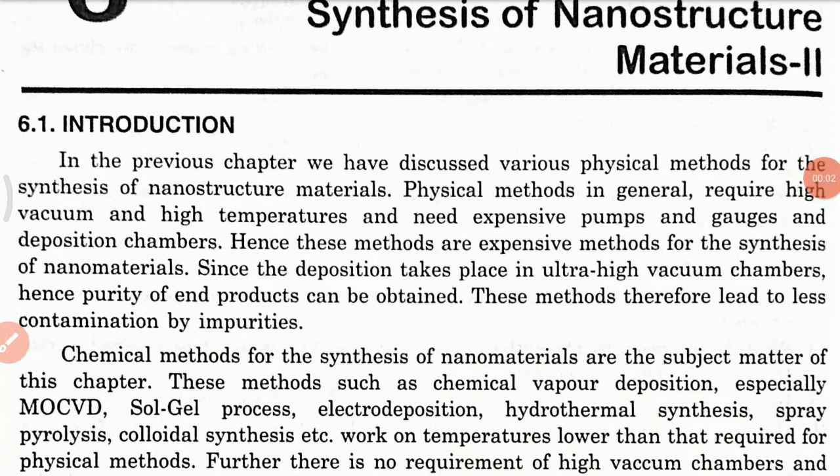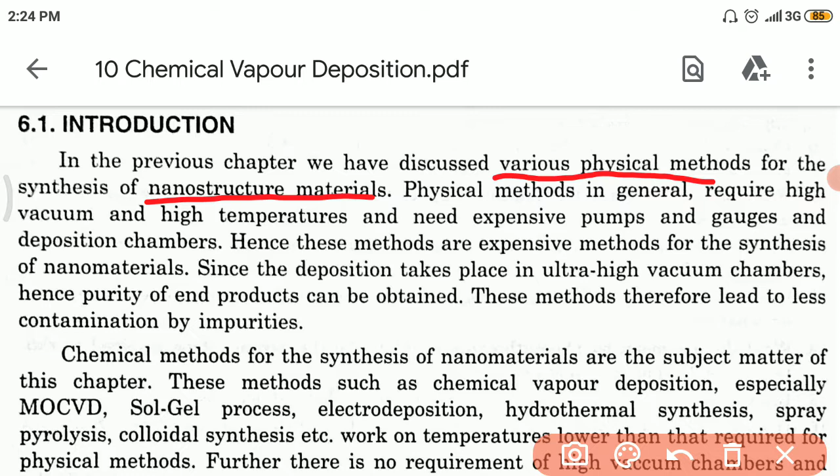So we have already discussed the various physical methods for the synthesization of nanostructure materials, and these physical methods in general require high vacuum and high temperature. Also they need expensive pumps and gauges and deposition chambers for their operation. That is why these methods are expensive methods for the synthesization of nanomaterials.

Now since here the deposition takes place in an ultra high vacuum chamber, the purity of the end products can be obtained, and these methods therefore lead to less contamination by impurities.

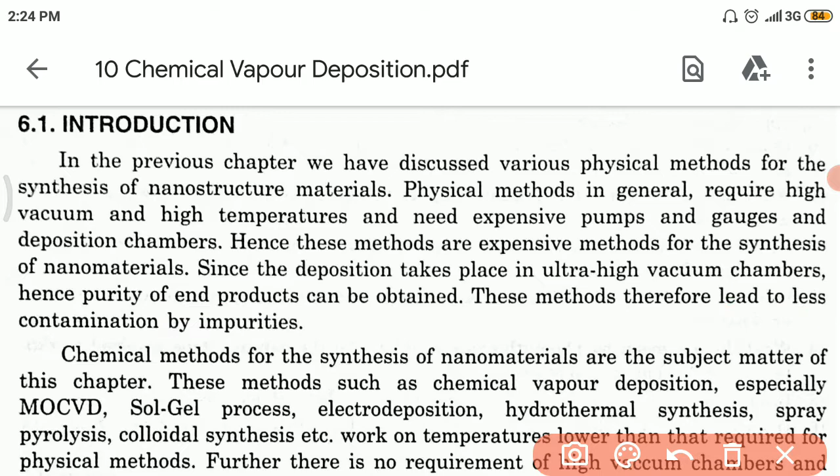Now in case of chemical methods, we can have synthesis of nanomaterials by chemical methods, which are actually the subject matter of this chapter, and these methods include chemical vapor deposition, especially MOCVD, that is metal organic chemical vapor deposition, then the sol-gel process, electrodeposition, hydrothermal synthesis, spray pyrolysis, colloidal synthesis, etc., which work on temperatures lower than those required by the physical methods.

Further, there is no requirement of a high vacuum chamber, and these chemical methods are quite inexpensive. So as a result these methods provide cost effective synthesis of nanomaterials as compared to the physical methods. Now chemical methods are suitable for large scale production, and these methods involve simple techniques,

but there are possibilities of foreign atoms or ions being adhered to the desired film or materials as impurities. Hence we can say more contamination occurs in chemical methods than in physical methods, so it will result in less purity as far as the end products are concerned. So this is the basic introduction.

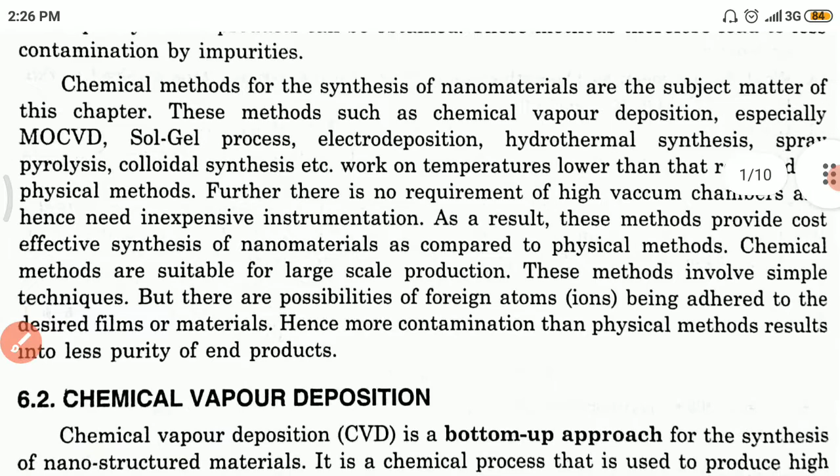Now let us come to the subject today, chemical vapor deposition, in short CVD, which is a bottom up approach. Bottom up means from small materials having nano dimension we build up towards the bigger, bulk size material for the synthesization of nanostructure materials. It is a chemical process used to produce high quality, high performance solid materials.

In the semiconductor industry, the CVD process is used for the production of thin films and in micro fabrication processes, which widely use the CVD technique to deposit materials in various forms such as monocrystalline, polycrystalline, amorphous and epitaxial, etc.

These materials include silicon with oxide, carbide and nitride, etc. Then carbon, such as fiber, nanotubes, diamond, graphene. Then we have fluorocarbons, filaments, tungsten, titanium nitride and various dielectrics with high dielectric constants.

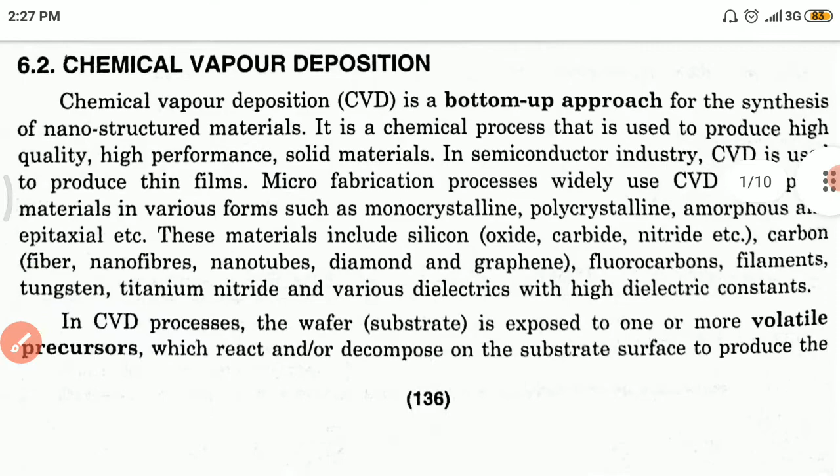Now in the CVD process, the wafer, that is your substrate, is exposed to one or more volatile precursors, which react and/or decompose on the substrate surface to produce the desired deposit. This is shown in the figure. You can see here the CVD, that is chemical vapor deposition, apparatus.

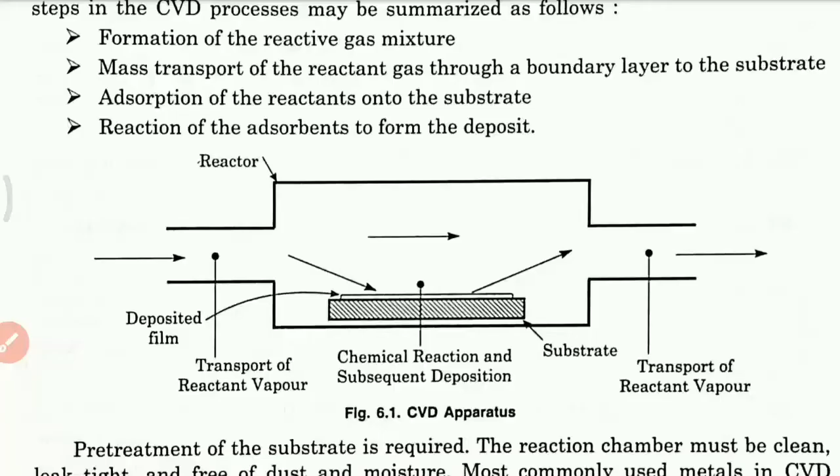In this figure, this is our substrate, and above this substrate we have the deposition of the thin film by chemical reaction and subsequent deposition. From this path we are transporting the reactant vapor, which goes this way, is utilized in the chemical reaction and comes out this way. So this figure is quite simple.

Now coming back, here the process of decomposition can be assisted or accelerated by using heat, plasma or other processes, and the precursor can be in gas, liquid or solid form. Gaseous precursors are introduced into the chamber at normal pressures and temperatures, while solid and liquid precursors require high temperature and/or low pressures.

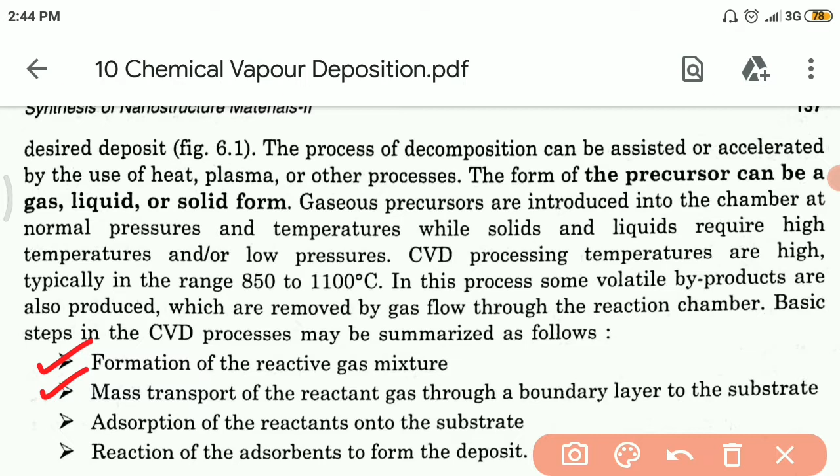Now CVD processing: here the temperatures are high, typically in the range of 850 to 1100 degrees Celsius, and in this process some volatile byproducts are also produced, which are then removed by the gas flow through the reaction chamber. The basic steps in the CVD process can be summarized as follows. Number 1, formation of the reactive gas mixture, then mass transport of the reactant gas through a boundary layer to the substrate, then adsorption of the reactants onto the substrate, and finally reaction of the adsorbents to form the deposit.

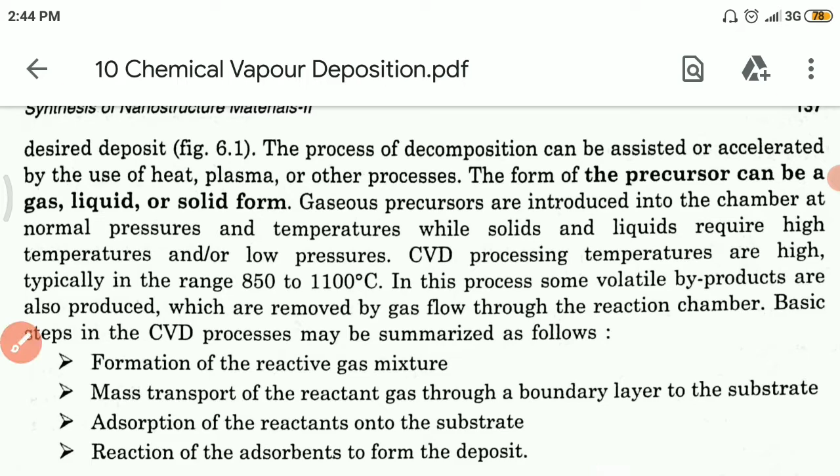Now some of the precautions required in the CVD technique are pre-treatment of the substrate, and the reaction chamber must be clean, leak tight and free from dust particles and moisture. The most commonly used metals in CVD coatings are nickel, tungsten, chromium, titanium carbide, etc.

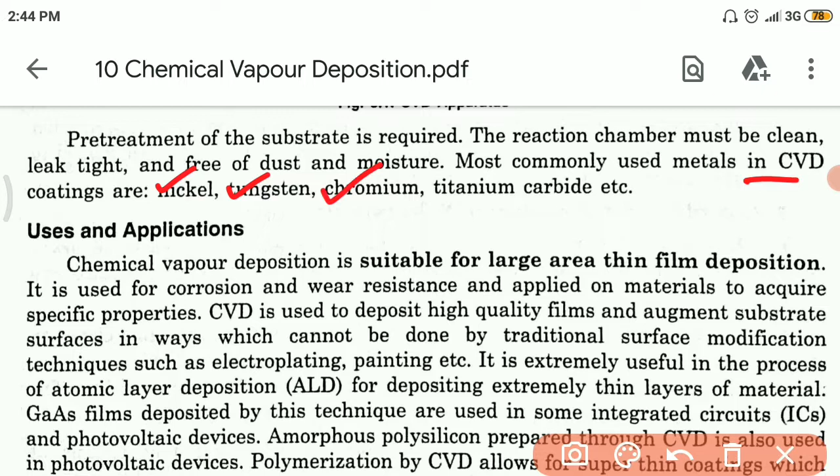Now let us see some of the uses and applications of the CVD technique. It is suitable for large area thin film deposition and used for corrosion and wear resistance, and also applied on materials to acquire specific properties. CVD is used to deposit high quality films and augment substrate surfaces in ways which cannot be done by traditional surface modification techniques like electroplating, painting, etc.

It is extremely useful in atomic layer deposition, that is ALD, for depositing extremely thin layers of material. For example, GaAs, that is gallium arsenide films, deposited by the CVD technique are used in some ICs, that is integrated circuits, and also photovoltaic devices. Similarly, amorphous polysilicon prepared through CVD is also used in photovoltaic devices.

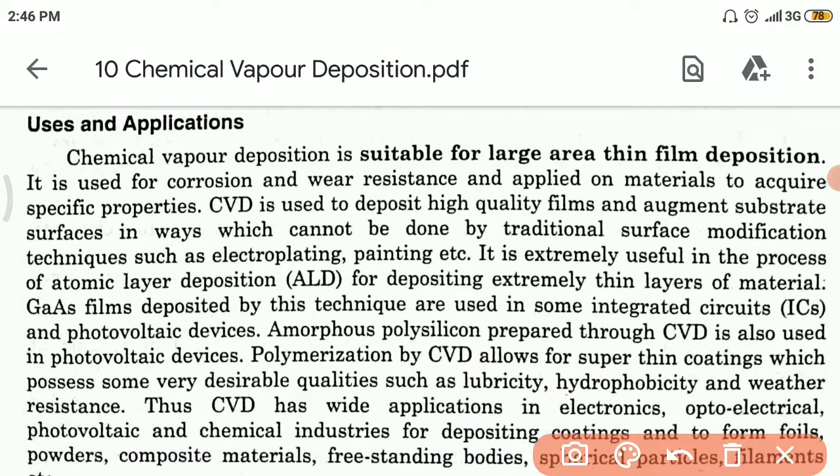Then polymerization by CVD allows for super thin coatings which possess very desirable qualities such as lubricity, hydrophobicity and weather resistance. Thus CVD has a wide range of applications in electronics, opto-electrical, photovoltaic and chemical industries for depositing coatings and to form foils, powders, composite materials, free standing bodies, spherical particles and filaments, etc.

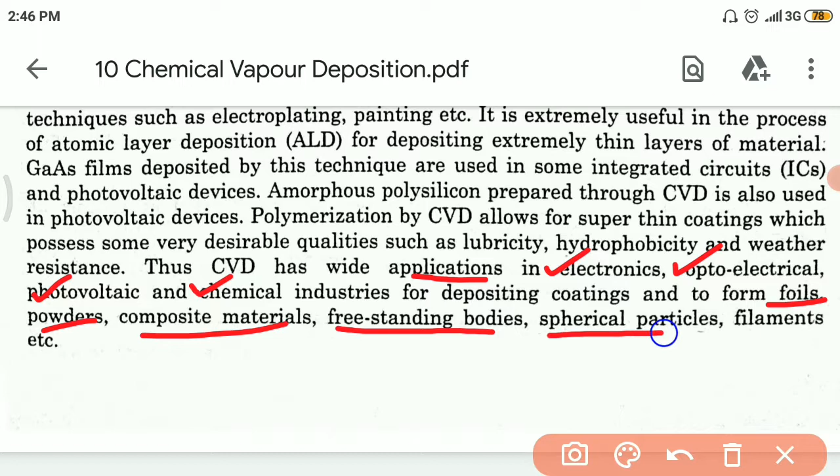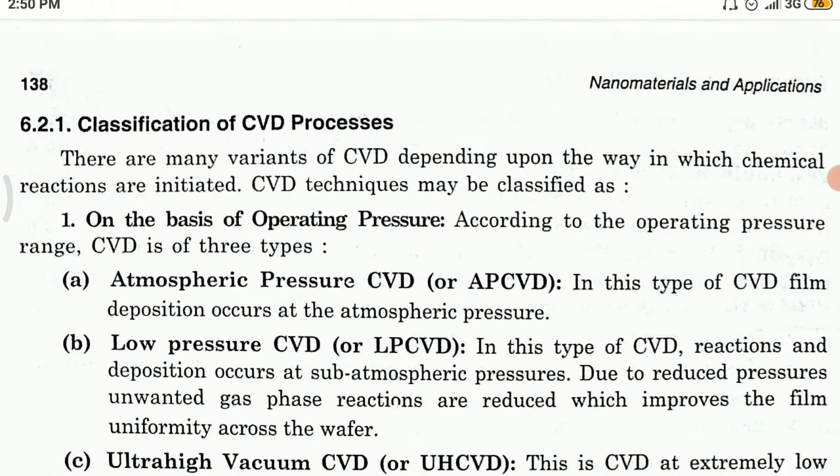Now moving further, let us classify the CVD processes. The CVD processes have variants which depend upon the way in which the chemical reactions are initiated. Accordingly, we can classify the CVD techniques as follows. First, on the basis of the operating pressure, it can be classified into three types. Number 1, atmospheric pressure CVD, that is APCVD, where the film deposition occurs at atmospheric pressure.

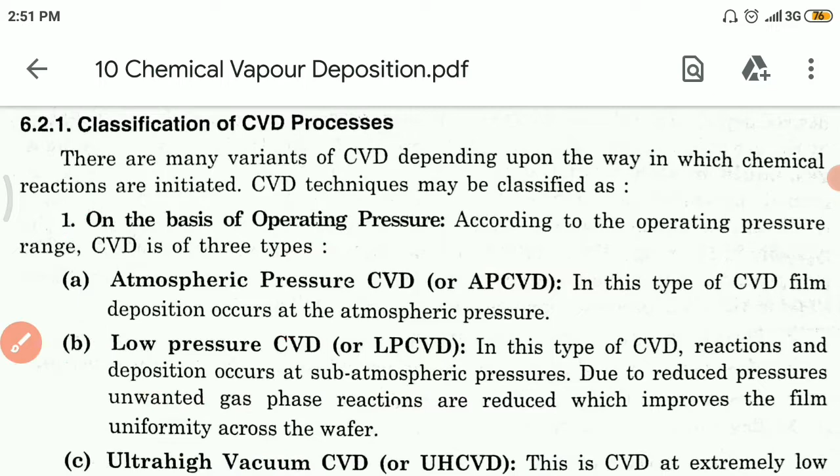Then low pressure CVD, that is LPCVD, where the reaction and deposition occur at subatmospheric pressure. Due to reduced pressure, unwanted gas phase reactions are reduced, which improves film uniformity across the wafer. The third one is ultra high vacuum CVD, that is UHVCVD, performed at extremely low pressure, typically below 10 to the power minus 6 Pascal, nearly 10 to the power minus 8 torr. Of these three types, the most widely used is LPCVD, low pressure CVD.

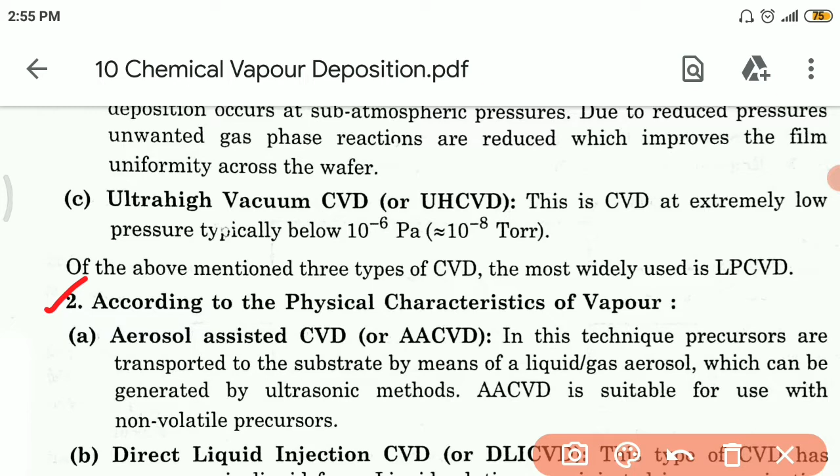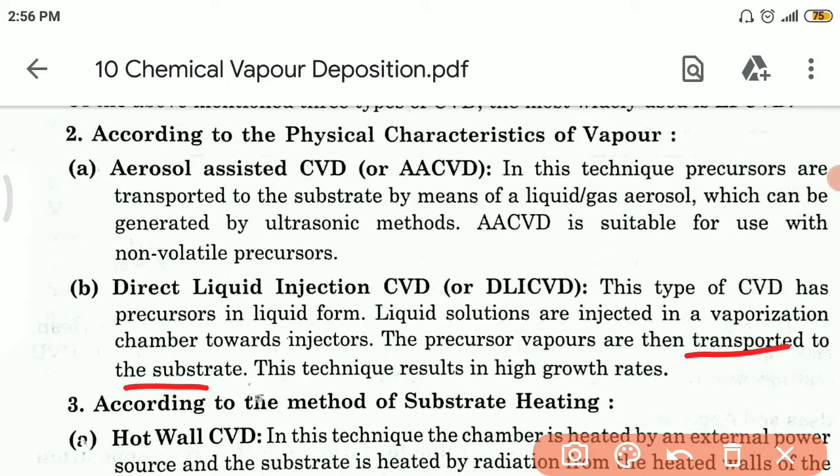Now the second category of classification is according to the physical characteristics of the vapor. Number one, aerosol assisted CVD, that is AACVD, where the precursors are transported to the substrate by means of a liquid or gas aerosol, which can be generated by ultrasonic methods, and AACVD is suitable for non-volatile precursors. The second is direct liquid injection CVD, that is DLI CVD, where the precursors are in liquid form and the liquid solutions are injected into the vaporization chamber through the injectors. The precursor vapors are then transported to the substrate, and this technique results in high growth rates.

Now the third type of classification is on the basis of the method of substrate heating, so we can have two types in this way.

Number one is the hot wall CVD, where the chamber is heated by the external power source and the substrate is heated by radiation from the heated walls of the chamber. And the second one is the cold wall CVD, where the substrate is directly heated either by induction or by passing current through the substrate itself, and in some cases the substrate is heated by directly placing a heater in contact with it. So here the walls of the chamber are maintained at room temperature.

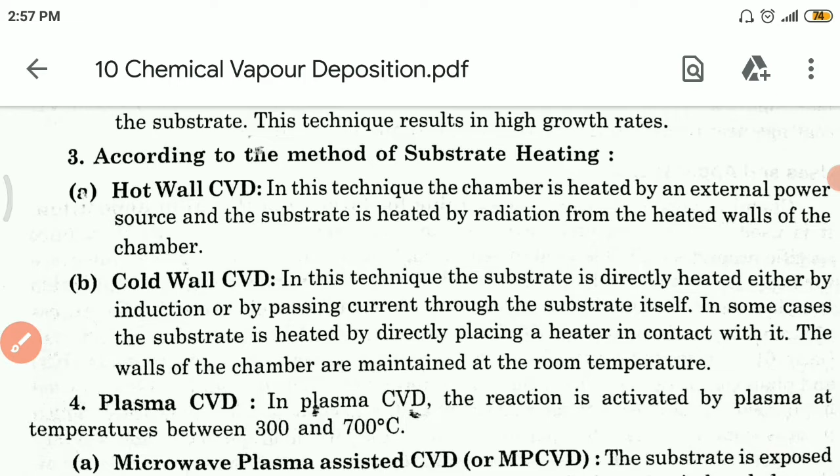Now coming to the fourth one, the plasma CVD. In case of plasma CVD, the reaction is activated by plasma at a temperature between 300 to 700 degrees Celsius. These are further divided into three types. Number one is microwave plasma assisted CVD, that is MPCVD. Here the substrate is exposed to one or more volatile precursors, in presence of microwave induced plasma. These precursors react or decompose on the substrate in order to produce a deposit.

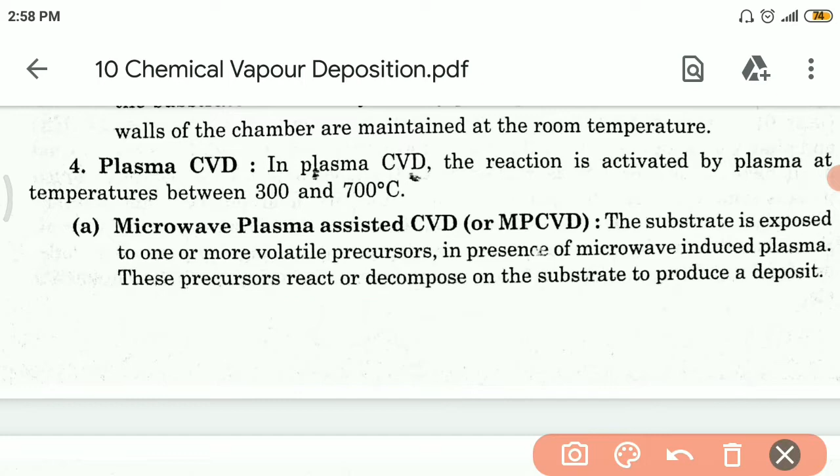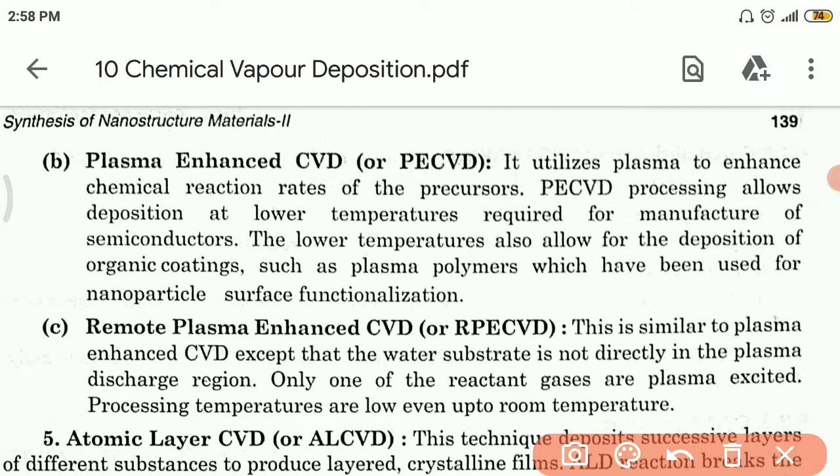The second one is the plasma enhanced CVD, where it utilizes the plasma to enhance the chemical reaction. That is why plasma enhanced. So it enhances the chemical reaction rates of the precursors. This PECVD processing allows the deposition at lower temperatures, which are required for manufacture of the semiconductors. The lower temperatures also allow for the deposition of organic coatings such as plasma polymers, which have been used for nanoparticle surface functionalization.

The third one is the remote plasma enhanced CVD, that is RPECVD, which is quite similar to the plasma enhanced CVD, except that here the wafer substrate is not directly in the plasma discharge region. So here only one of the reactant gases is plasma excited and the processing temperatures are kept low, even down to room temperature.

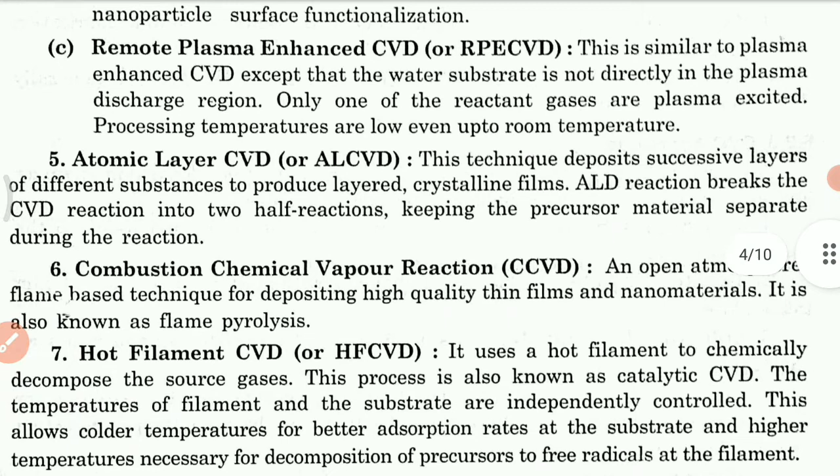Moving further, the next category of classification is the atomic layer CVD, that is ALCVD. This technique deposits successive layers of different substances in order to produce layered crystalline films. Here the ALD reaction breaks the CVD reaction into two half reactions, keeping the precursor materials separate during the reaction process. The next one is the combustion chemical vapor deposition, that is CCVD. It is an open atmosphere flame based technique for the deposition of high quality thin films and nanomaterials. It is also known as

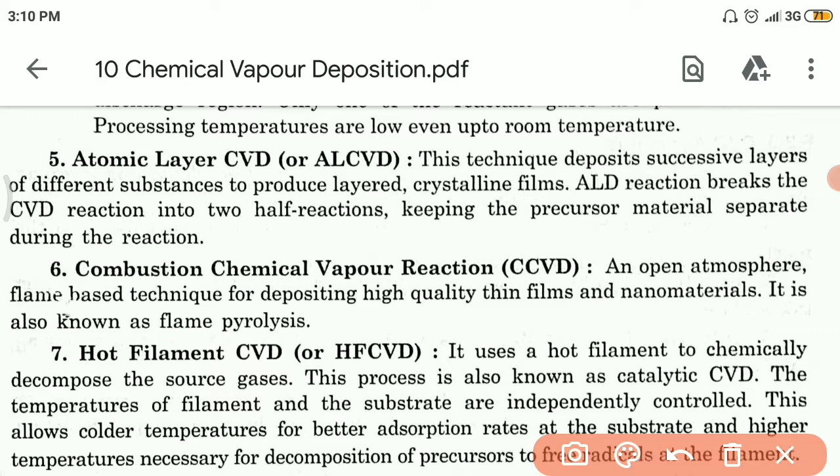flame pyrolysis. The next one is the hot filament CVD, that is HFCVD, which uses a hot filament to chemically decompose the source gases, and this process is also known as catalytic CVD. Here the temperatures of the filament and the substrate are independently controlled, and this allows colder temperatures for better adsorption rates at the substrate and higher temperatures which are required for decomposition of precursors to free radicals at the filament.

Now the next one is the hybrid physical chemical vapor deposition, that is HPCVD, and this process involves both chemical decomposition of precursor gas and vaporization of a solid source. Hence it is a thin film deposition technique which combines physical vapor deposition with chemical vapor deposition. So it is a combination of both physical and chemical vapor deposition processes.

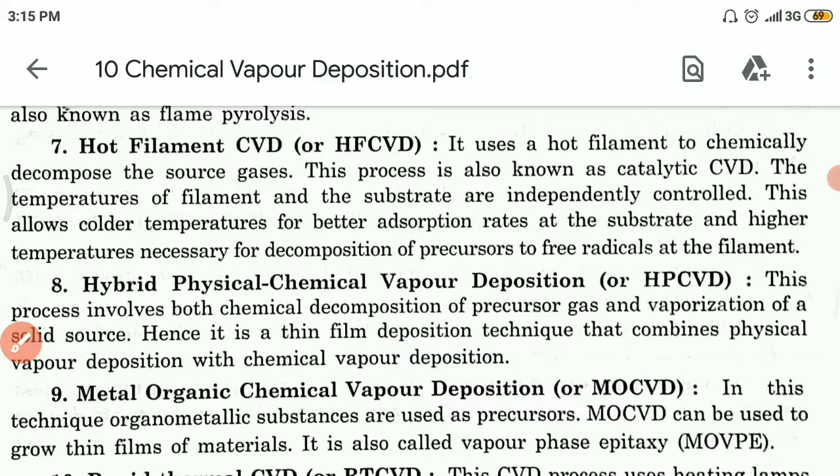Now the next one is the metal organic chemical vapor deposition. Later on we will read about this in detail. It is also called MOCVD in short, and in this technique organometallic substances are used as the precursors, and it can be used to grow thin films of materials. It is also called metal organic vapor phase epitaxy, that is MOVPE.

Now the next one is the rapid thermal CVD, that is RTCVD, which uses heating lamps and other methods to rapidly heat the substrate. In the thermal CVD process the reaction is activated by a high temperature above 900 degrees Celsius, thereby heating only the substrate rather than the gas or chamber wall, which helps to reduce the unwanted gas phase reactions that can lead to particle formation. So growth of uniform thickness film occurs in this process.

Now the next one is the photo initiated CVD, that is PICVD, and in this process we have UV light, that is ultraviolet light, which has sufficient photon energy to break the chemical bonds in the reactant molecules, and it is used to stimulate the chemical reactions.

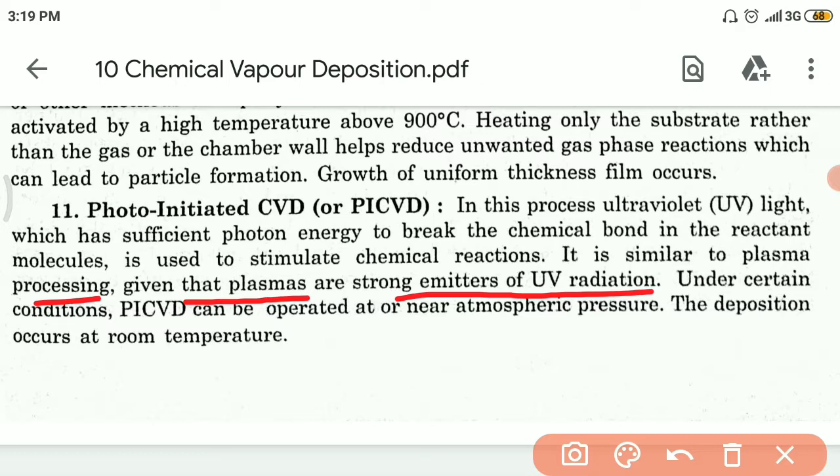Okay, and it is similar to the plasma processing, given that the plasmas are strong emitters of UV radiation, and under certain conditions the PICVD can be operated at or near atmospheric pressure, and the deposition occurs at room temperature.

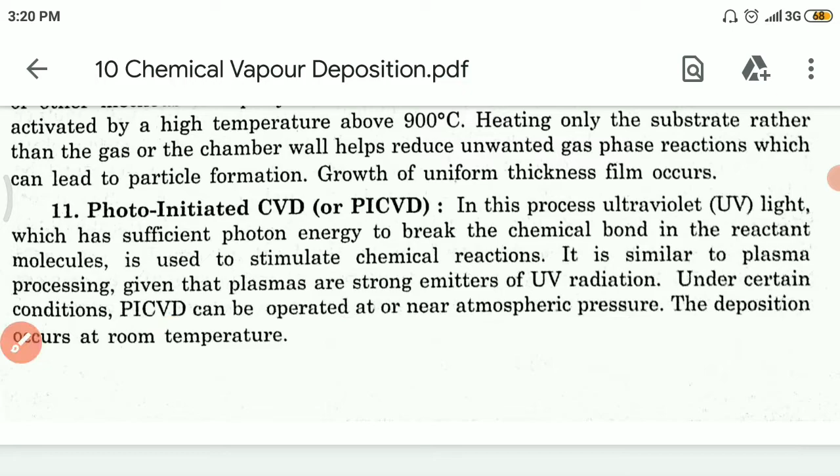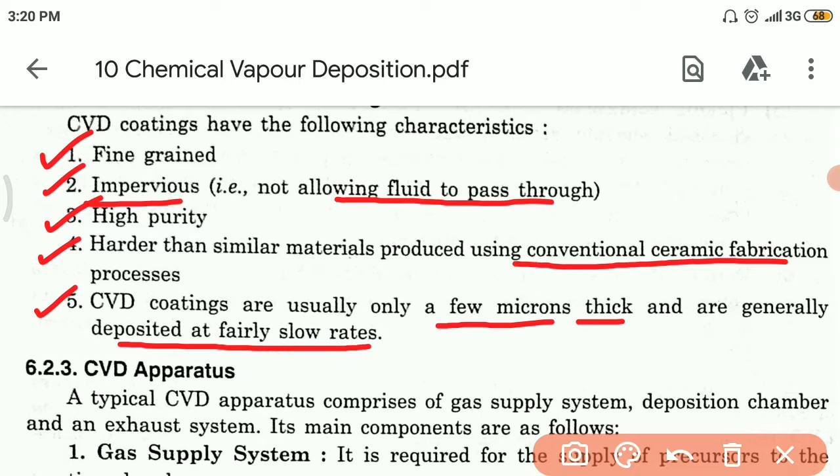Okay, now we have the CVD apparatus. So a typical CVD apparatus comprises a gas supply system, deposition chamber, and an exhaust system, and the main components are as follows. Number one is the gas supply system, which is required for the supply of precursors to the reaction chamber. Then the second one is the reactor chamber, and this is the chamber within which the deposition of the film takes place.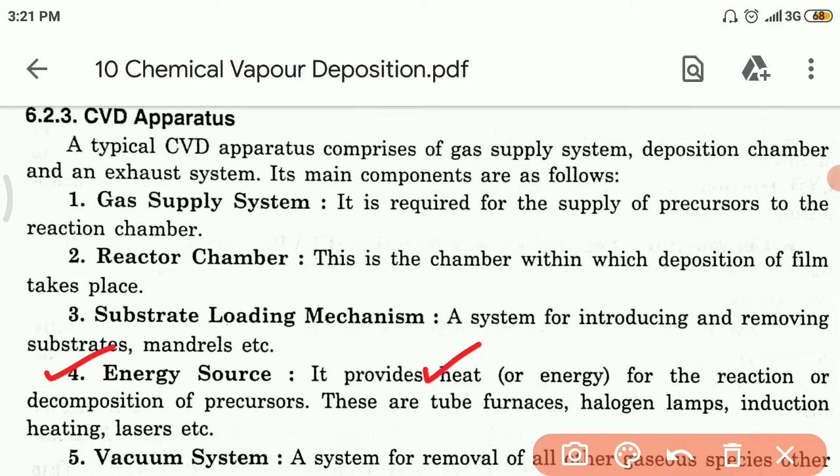Then the third one is the substrate loading mechanism, a system for introducing and removing substrates, mandrels, etc. Then the fourth one is the energy source, which provides the energy in the form of heat for the reaction or decomposition of the precursors. These energy sources can be tube furnaces, halogen lamps, induction heating, and lasers, etc.

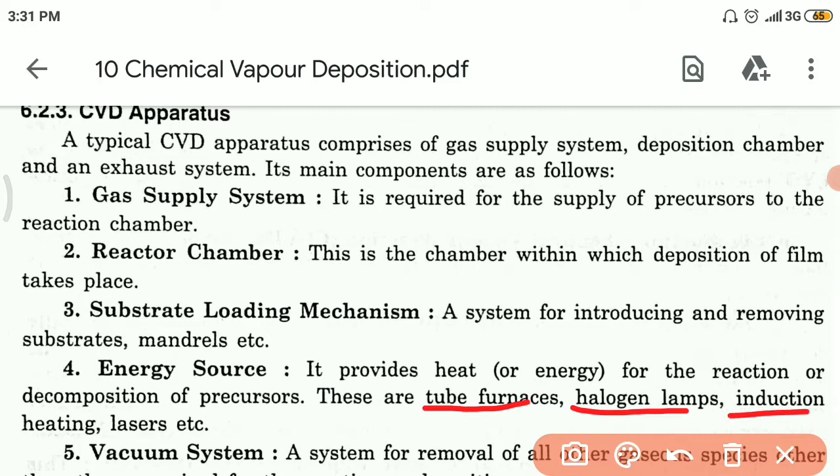Now the next one is the vacuum system, which is used for the removal of all gaseous species other than those required for the reaction or deposition. Then we have the exhaust system, which is used for the removal of volatile byproducts from the reaction chamber. Then finally we have the process control equipment, like gauges, controls, etc., in order to monitor the process parameters like pressure, temperature and time. For this purpose we can have alarms and safety devices which are included in this category.

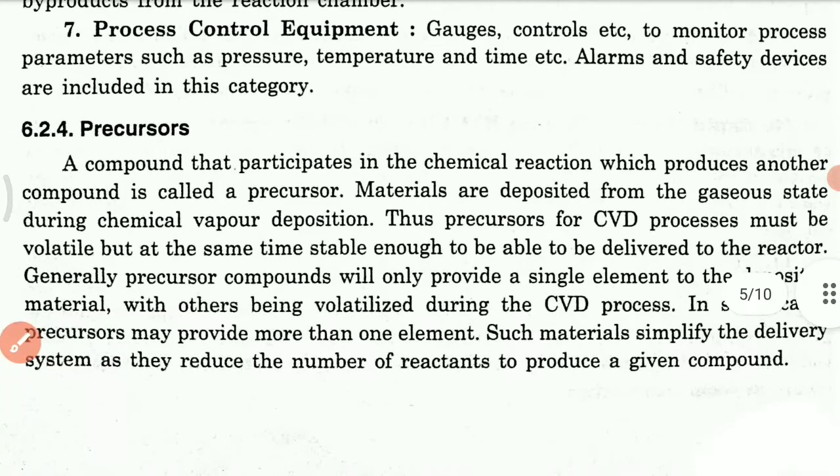Okay, now the next one is the precursors. So what do we mean by precursor? It is a compound which participates in the chemical reaction and thereby produces another compound, so it is called a precursor. Now we know that materials are deposited from the gaseous state during the chemical vapor deposition process. So the precursors for CVD processes must be volatile, but at the same time they must be stable enough to be delivered to the reactor.

Generally the precursor compounds will only provide a single element to the deposited material, with others being volatilized during the CVD process. In some cases the precursors may provide more than one element. Such materials simplify the delivery system as they reduce the number of reactants to produce a given compound.

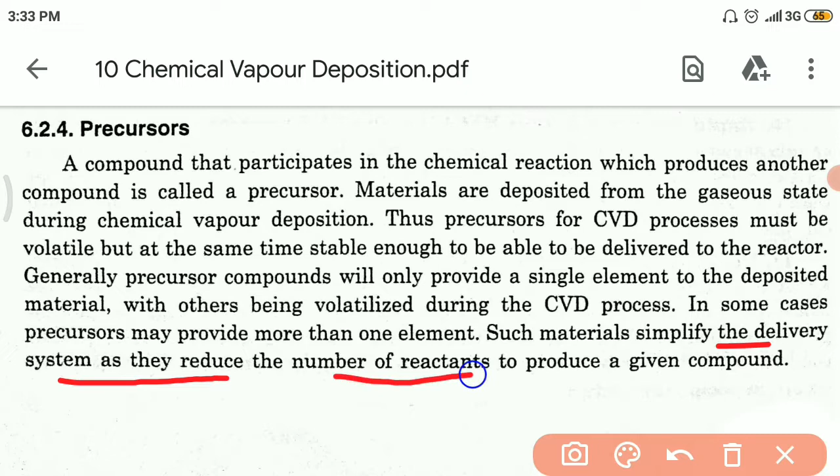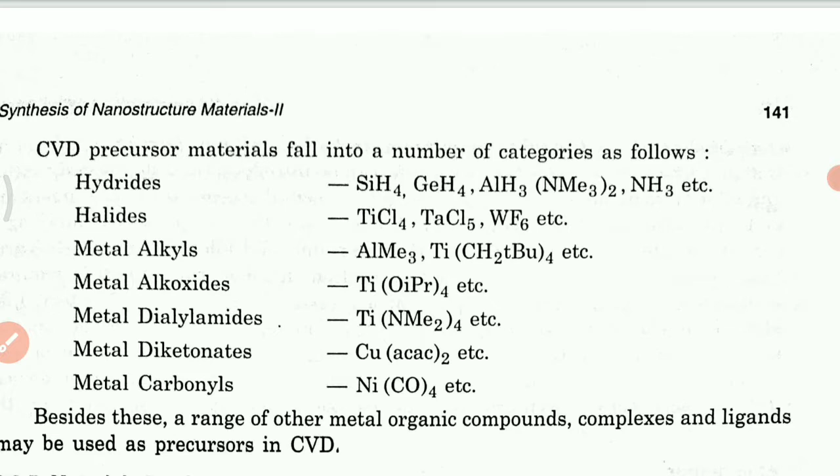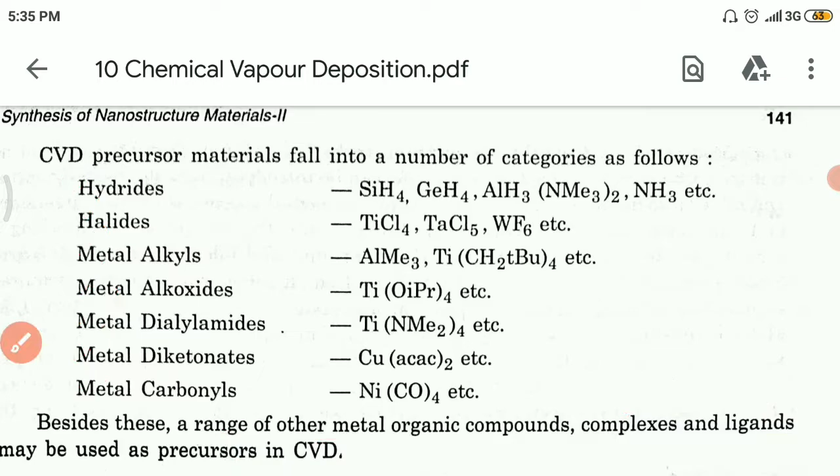So CVD precursor materials fall into a number of categories as follows. These include hydrides, halides, metal alkyls, metal alkoxides, metal dialkylamides, metal diketonates, and metal carbonyls. But besides these, a range of other metal organic compounds, complexes, and ligands may be used as precursors in this CVD technique.

So what are the materials which are produced by CVD processes? Chemical vapor deposition is an extremely versatile process which can be used to process almost any metallic or ceramic compound. So it can produce elements, metals and alloys, along with carbides, nitrides, oxides and intermetallic compounds, etc.

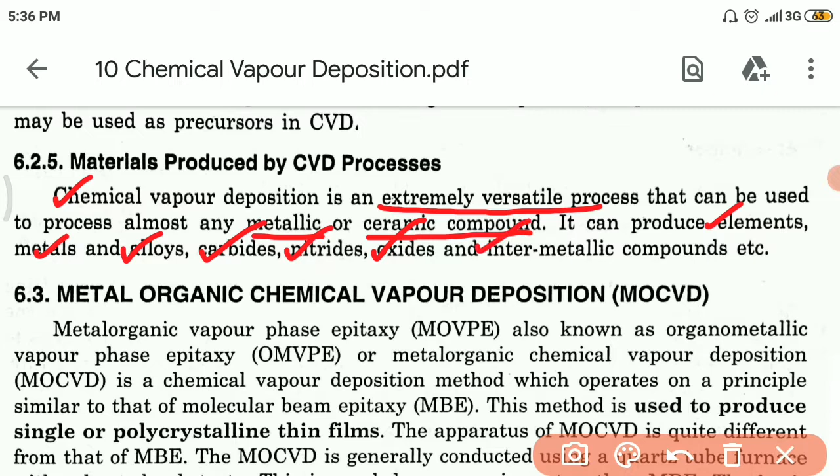Okay, now let us have a detailed idea about metal organic chemical vapor deposition, that is MOCVD. It is metalorganic vapor phase epitaxy, MOVPE, also known as organometallic vapor phase epitaxy, OMVPE, or metalorganic chemical vapor deposition, MOCVD, and it is a chemical vapor deposition method which operates on a principle similar to that of molecular beam epitaxy, MBE, and this method is used to produce single or polycrystalline thin films.

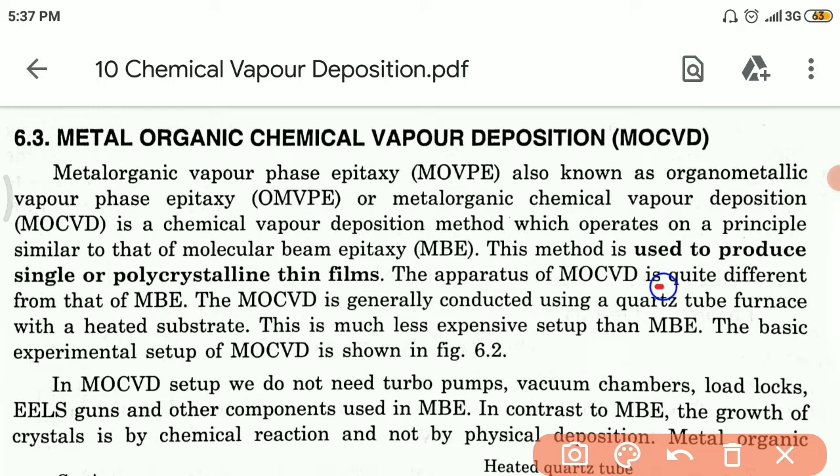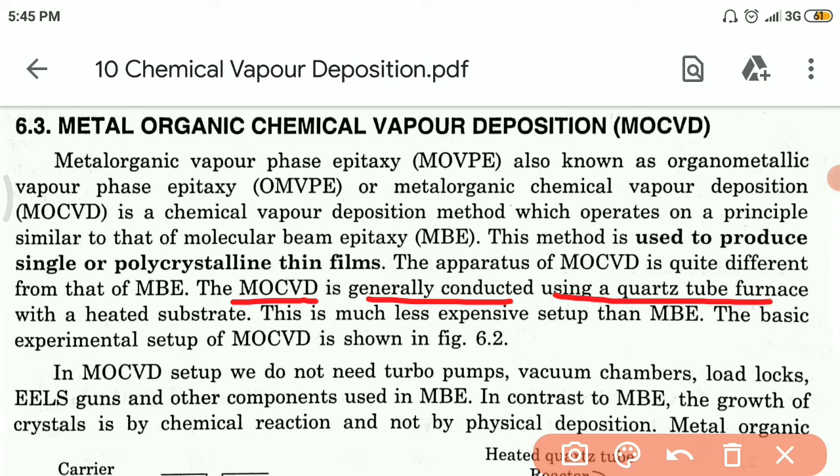The apparatus of MOCVD is quite different from that of MBE, molecular beam epitaxy. MOCVD is generally conducted using a quartz tube furnace with a heated substrate, and this is a much less expensive setup than that of molecular beam epitaxy.

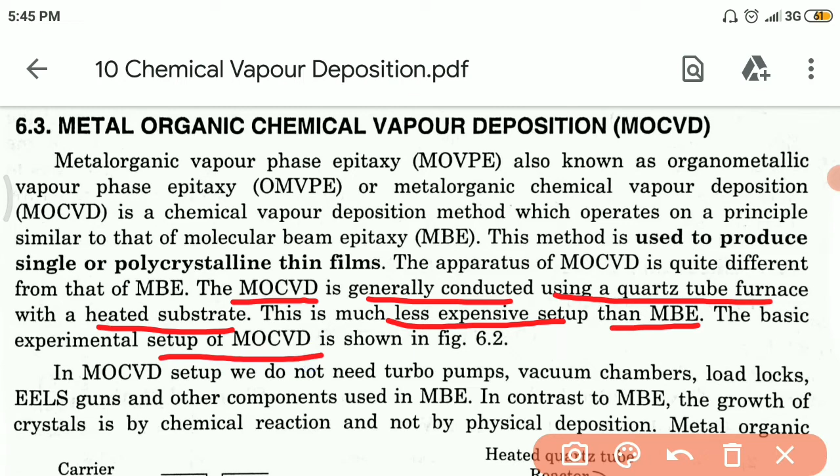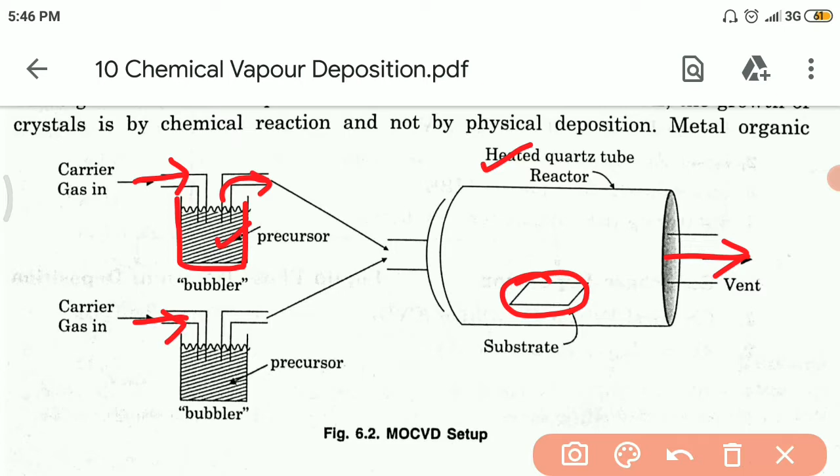So the basic experimental setup of this MOCVD is shown in this figure. As you can see, this is the inlet of the carrier gas, where it is going to the bubbler which is containing the precursor. Then it is coming out towards the heated quartz tube reactor which is containing the substrate, and it is coming out as a vent.

Now the benefit of this MOCVD setup is that here we do not require any turbo pumps, vacuum chambers or load locks, EELS, that is electron energy loss spectroscopic guns, and other components which are used in the molecular beam epitaxy technique. In contrast to the MBE technique, here the growth of the crystal is by chemical reaction and not by the physical deposition method.

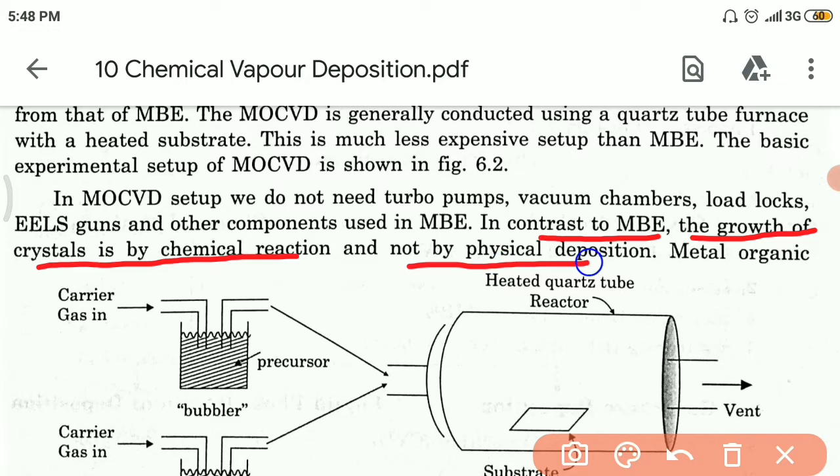Now the metal organic compounds such as trimethyl aluminum, trimethyl gallium, trimethyl indium, as well as gases like phosphine or arsine can be introduced into the heated reactor and allowed to decompose, giving the desired elemental species. And if the precursors are in liquid form, then the compound is brought into the gas phase by bubbling a carrier gas such as helium through the compound and allowing the gas to carry small amounts of precursors into the reaction chamber, as you have seen in the figure.

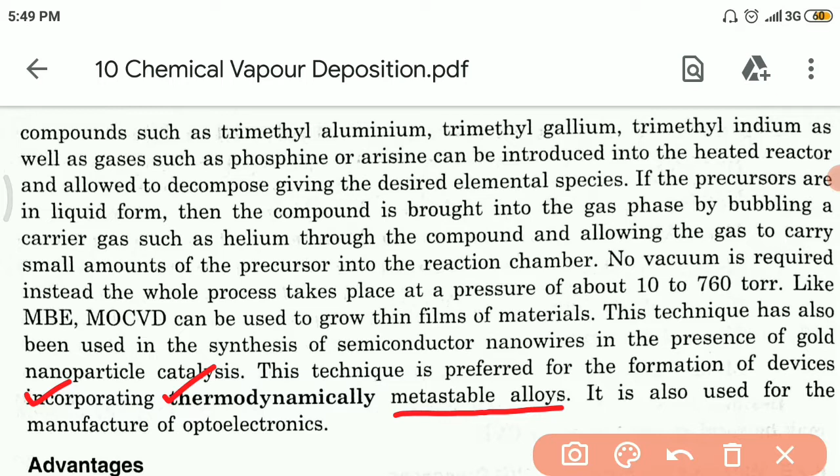So here no vacuum is required; instead the whole process takes place at a pressure of about 10 to 760 torr. Like MBE, MOCVD can be used to grow thin films of materials, and this technique has also been used in the synthesis of semiconductor nanowires in the presence of gold nanoparticle catalysts. This technique is preferred for the formation of devices incorporating thermodynamically metastable alloys. So it is also used for the manufacture of optoelectronics. So this is something about MOCVD, that is metal organic chemical vapor deposition.

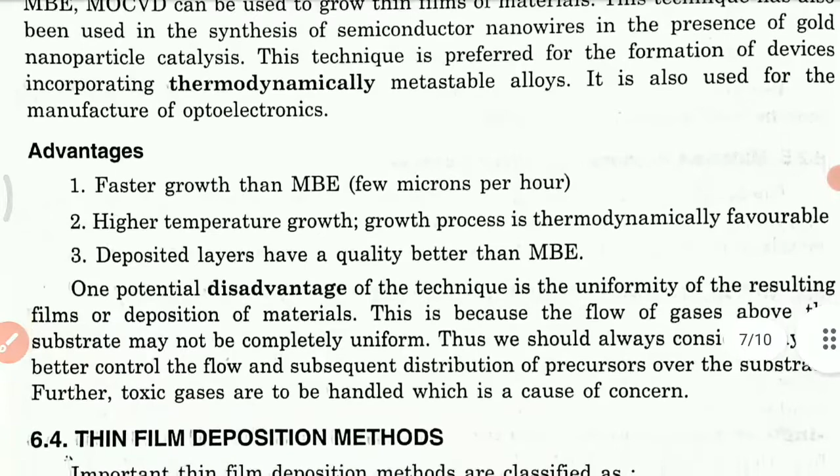Now let us see what are the advantages. Number one, it will have faster growth than molecular beam epitaxy, around a few microns per hour growth rate. The second one, it will have higher temperature growth, that means the growth process is thermodynamically favorable. And the third one, the deposited layers will have a quality which should be better than MBE.

However, one of the potential disadvantages of this technique is the uniformity of the resulting films or the deposition of the materials. This is because the flow of the gases above the substrate may not be completely uniform. That is why we should always consider ways to find better control over the flow and subsequent distribution of the precursors over the substrate. Further, it also has a major disadvantage of involving toxic gases which are to be handled with care because they may be a serious concern.

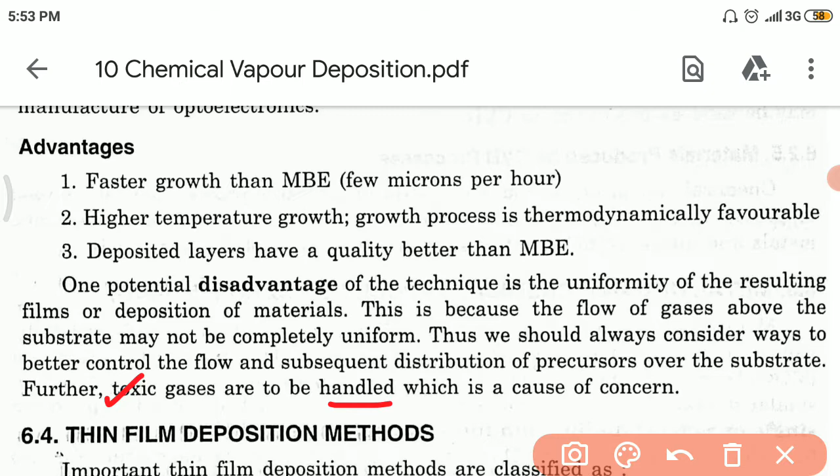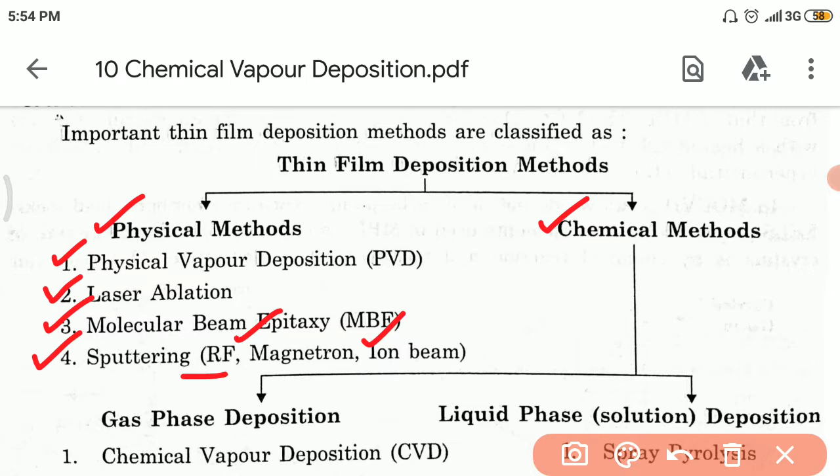So finally let us see the thin film deposition methods, which are broadly classified into two categories. Number one is the physical method and number two is the chemical method. In physical methods, we have physical vapor deposition, that is PVD, laser ablation, molecular beam epitaxy MBE, and sputtering, that is RF or radio frequency, magnetron or ion beam. In chemical methods, we have gas phase deposition or liquid phase, that is solution deposition. Gas phase deposition is further classified into chemical vapor deposition CVD, which is what we have read today, and atomic layer epitaxy ALE.

Liquid phase or solution deposition is classified into four types: spray pyrolysis, sol gel, spin coating, and dip coating. These things we will read further in the upcoming classes. Physical methods are expensive but relatively more reliable and reproducible. Most of the chemical methods, although cost effective, have not had their full potential for obtaining device quality films completely explored in many cases.

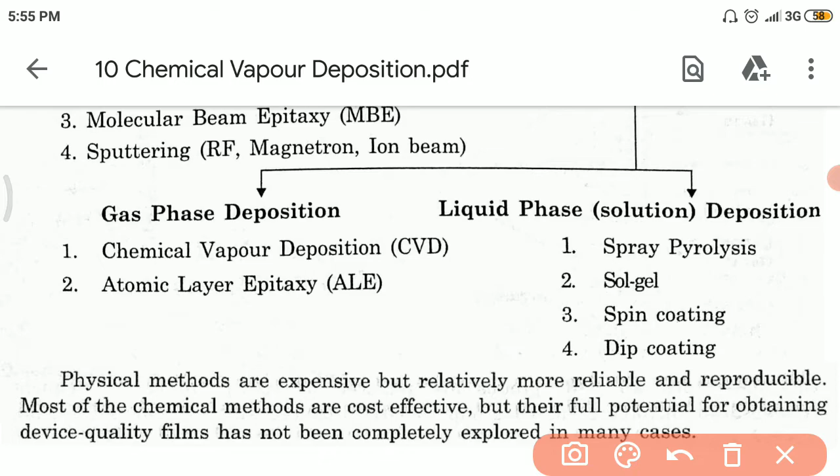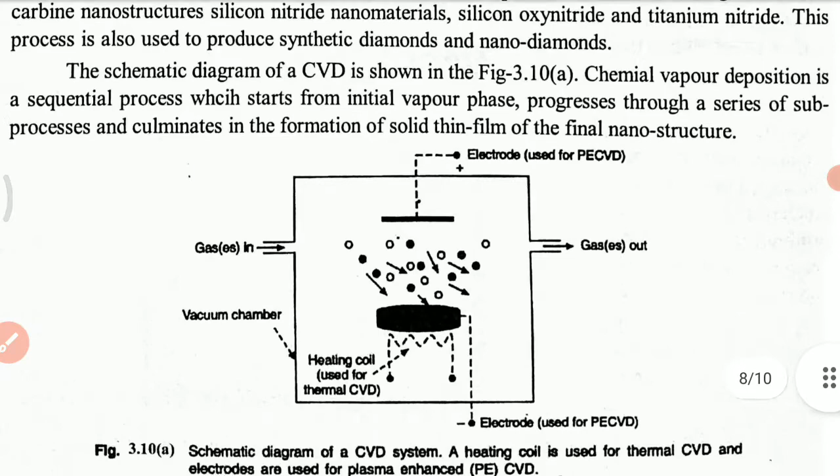So this is what I have taken from one book about chemical vapor deposition. Now you can see this is what I have taken from another book, where it has given chemical vapor deposition in a brief manner. I advise you to read it also, and by combining both books, make your notes accordingly. Thank you.